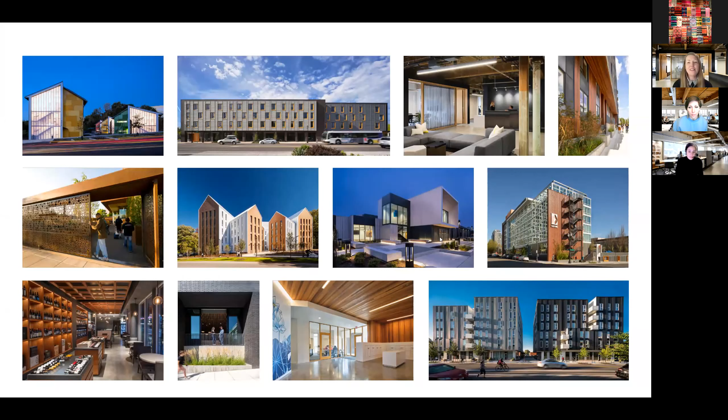So a little bit of history about our firm. Holst began 28 years ago with founding partners Jeff Storer and John Holmes working in their attic, which ironically is now what I'm doing, back then with drafting boards and I think one computer. If you put their last names together, Holmes and Storer, you get Holst. That's where our name came from.

About 4 years ago, we went through a leadership transition where those two founding partners retired. There was some more growth, and my partners Kim Wilson, Dave Oddie, and Kevin Volk took over the reins. Also in 2017, we became a certified woman-owned business. We had some more growth, and since then we've been doing great work.

We've been working hard to evolve and actively improve the practice, along with all of our awesome colleagues like Ray and Yuki. And if for any reason anyone else from Holst called in today, hello, welcome.

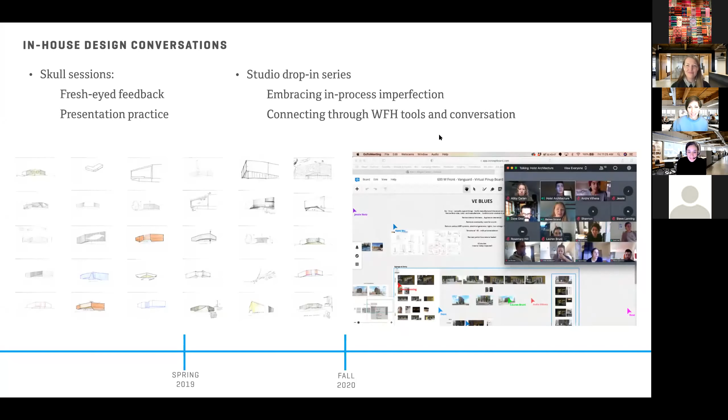Next, I'm just going to do one little snapshot of how collaboration works on an individual team, and I'll use my team as an example since it's what I'm most familiar with right now. But I think any team at Holst might have a slightly different take on this. I think there are three things on my team that seem to be emerging as really facilitating a collaborative design process.

I want to frame that within the larger acknowledgement that we're very lucky to have a toolkit of software that allows us to communicate and collaborate easily, such as Microsoft Teams, BIM 360 through Revit, and OneNote. Anything that allows simultaneous, quick back and forth organization of thoughts and ideas has been completely critical during this time of working from home.

But in a more intangible way, I think we've shifted, as Renee mentioned, from the phrase 'best idea wins' to just 'best idea' - removing that word 'wins' keeps the conversation open. There's something about winning that is very goal-oriented and shuts the process down a little, tending to pin it to a person for the duration of a project. Whereas if you say 'best idea,' there's an acknowledgement of ambiguity and contextual specificity - this best idea might work for this client, this context, this period, but it's not the universal best idea in that winner-takes-all mentality.

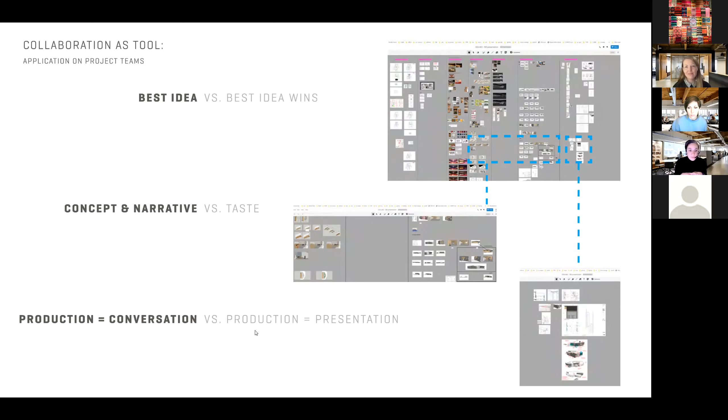So, benefits of collaboration - I think there's probably 100 items on this list, if not more. But in terms of what we're starting to observe at Holst, I think there are 4 different scales at which we're starting to see some of the benefits. At the individual level, I think having passion and ownership of design ideas leads to a sense of well-being and empowerment within your work and professional growth. At the team and firm level, greater collaboration and involvement in a project really bolsters skill and leadership growth, so it creates resilience.

At the level of the architectural field, talking about design can feel vulnerable at times - not just talking about design, but sharing one's own design ideas. So opening up, as I mentioned earlier, a space where failure is reframed as a learning opportunity, whether in conversation or brainstorming, has deepened our design conversation. And beyond Holst and beyond the profession, practicing collaboratively within the firm allows us to work better with the community and our stakeholders, shifting the idea of the architect as an author more toward the architect as a translator.

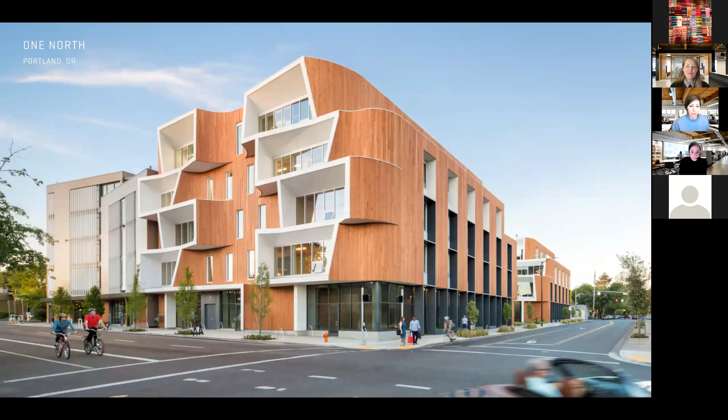The first two projects that I'm going to talk about are slices of city, we're calling them, and they're examples of establishing partnerships to realize a project. This first one is One North, which is a commercial office building in Portland.

This is a repeat client, I think the second project that we had done with him. And he came to us inspired by Gaudi and posed a question like, why do all buildings have to be rectilinear? So he wanted us to push these limits of form, which was interesting. It had worked the inverse way where we had come up with this design to show it to a client. As you all probably know, a lot of clients would be scared off by something like this, but it was a challenge for us to move forward with. The project is actually 2 buildings about 80,000 square feet, separated by a large public courtyard.

At the same time that One North came about, we also had been talking to a creative agency in town called Instrument, and they were looking for a new space for their office and creative workforce. Both owners were facing challenges on their projects. Instrument was having a hard time finding the right space, and One North was having a hard time finding an anchor tenant for the space. So we introduced them to each other, which is what made this project work.

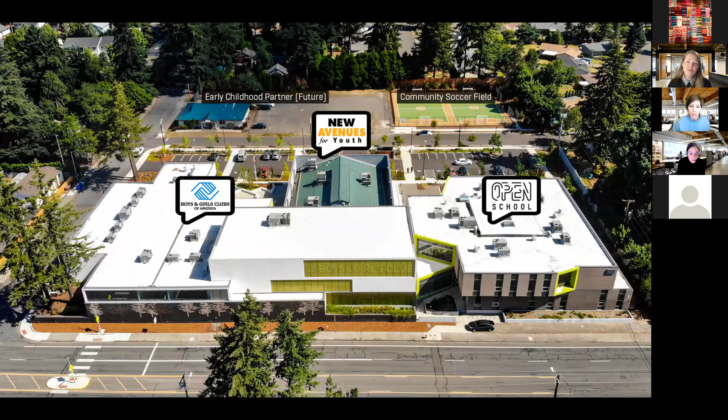Holst had been selected to design a new facility for Open School back in 2009. They needed to move because the people they were serving had shifted to a different part of town, so they needed to follow these people and place the services where they would be most utilized. But a new build was proving really expensive for them, and they weren't sure how they were going to make that work. So we were waiting for the right synergy of things to come together so that we could design this project for them.

Then we interviewed for Boys and Girls Club. They were moving out of a long-time location for similar reasons, needing to move services to be more central to the population that needed them most. They had found a site, but it was too big, though it was in the service area they wanted. So it was like each piece was coming together.

So we introduced the two agencies. Not only could they share the site, but they had complementary program pieces to share, like the cafeteria, the gym, and the assembly space. The sharing worked really well because Boys and Girls Club is a before and after school program, and the school operates during the day, so it didn't conflict with any of the school's needs. This collaboration provides great benefit to young people in an area that needs it most.

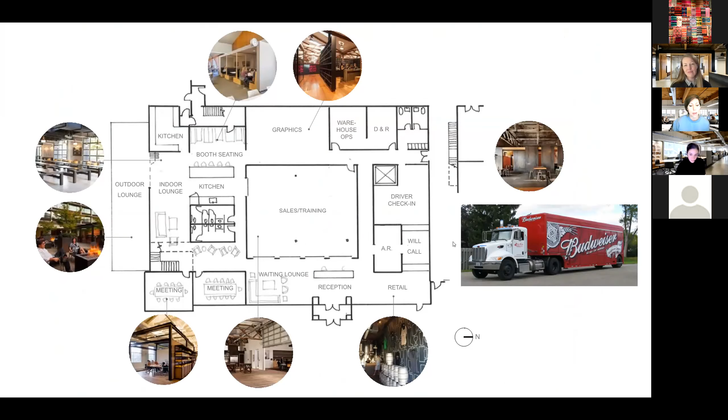In one of the early design concepts, what we proposed was to move the sales room front and center, and we likened it to their delivery trucks, these side loader trucks. It's the style of truck that they use to do all their deliveries around town. They were really drawn to this idea, and the thought that they could showcase this more active space up front was attractive to them. They decided not only to use it for their sales people, but realized that they could also utilize it as an event space. So this is the main first space that you see when you walk in the front door.

Then we actually moved their office space upstairs. It had previously been some of their underutilized warehouse space. It wasn't part of the cold storage, it was just a warehouse space. This being an industrial building in an industrial area, we stripped it down so you can see the nature of the structure and really see some of the things that the building had to offer already there.

They converted to an open office, which was kind of a stretch for them. They had been used to those really tall cubicles, but we balanced that with a lot of different quiet spaces or amenity spaces where they could convene and have little meetings if they wanted to. Like this, we called this a meeting pod, a freestanding open air room in the middle of the space. We continued some of this industrial detailing with these big sliding doors and even small details like trimming out the sidewalls of a skylight with copper, copper being a material found in some traditional beer making equipment.

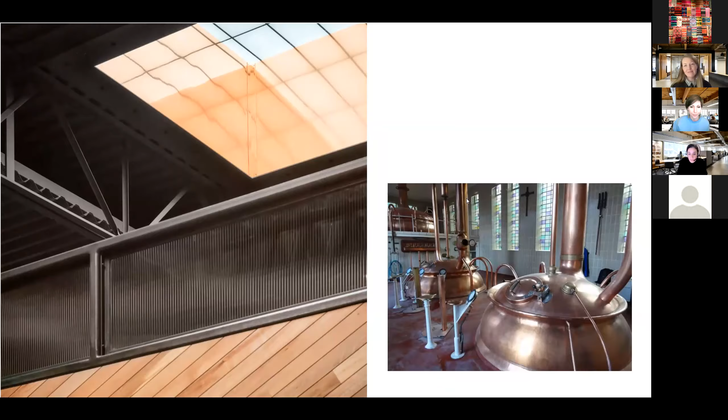For the rest of the space, we took things that they see every day and just kind of elevated them. We turned these kind of mundane things that line all their shelves and really started to showcase those things. So we have this keg wall in a really active space, visible from the reception area, and this bottle screen.

A funny story at this point, the bottle screen always makes me think of this. We had given them the budget that we got from the contractor when they priced out our schematic design drawings. The budget was pretty high, and we were pretty nervous, thinking we're going to face some serious VE for this project. We were all sitting down in the conference room, and Rob said, well, did you get all the cool stuff in? Did you get the keg wall and the bottle wall? Did you get the outdoor space and the brewery in the back? And we said, yeah, that was all in there. That's part of why it was more expensive. And he said, oh, that's great, let me go get a case of beer for everybody. He sent one of his employees out, and we all went home with beer.

Lucky for us, there is a retail space also in the building, so we can always just drop by and get more cases of beer. The great thing about the collaboration on this space is that they were really proud of it when it was done. It really felt like them, and it felt like home. And we, of course, were really proud as well.

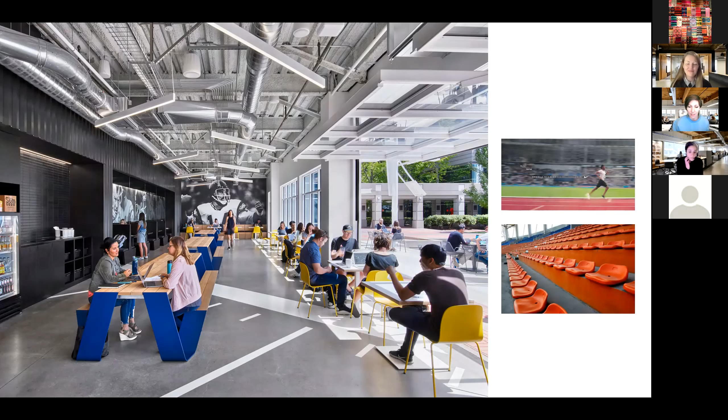We learned pretty quickly that they have a really strong design language they use to talk to each other about design. That was something different for us because, as architects, we kind of have our own language that we're used to. So it was really about understanding the terminology they use to describe things and adopting that as our new lexicon. They would use adjectives like stadium, hub, and community - words that don't necessarily always describe space, but the way they'd use it was that this was not stadium enough, or this was not hub enough. That was kind of an interesting insight into their company and their process, to get a taste of that.

We had some fun with them in terms of what we got to do. This is one room, one meeting space, that was dedicated to Dan Fouts and football, and we had fun with a lot of the different elements in here. We also did the entire furniture package for the building, so that was an interesting part of this project.

The collaboration on this was really great, having this strong design vision that they had. And with this space, we feel like it even more so showcases their brand and their identity.

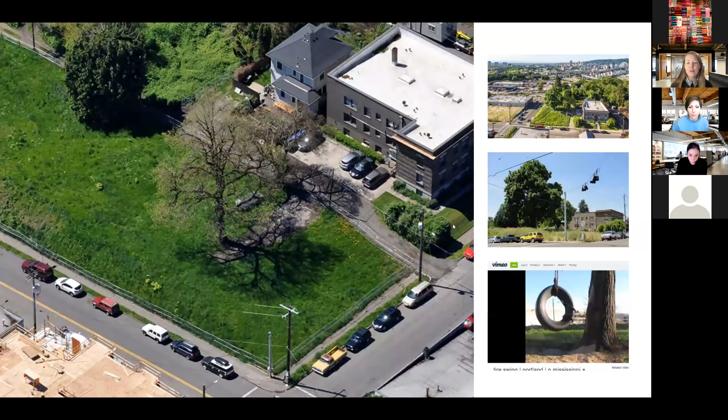The slice from this project that I want to highlight related to collaboration centers around a tree on the site - not just any tree, but a huge walnut tree that was sort of a neighborhood icon and popular hangout spot. It even sported a tire swing that had some videos posted about it, and it had its own Vimeo channel for a while. It was a very important tree in the neighborhood.

When we started on the project, we first looked at massing the building on the south side to preserve an open area at the north and keep the tree. But as the design process progressed and arborists evaluated the tree, it was determined it was pretty unhealthy. It had a big split down the trunk and maybe had about 10 years before it was going to need to come down.

So in honor of the tree, and the site, and that tree's popularity in the neighborhood, we worked with the contractor to have it taken down and milled for reuse. We've had this done now on a couple of Holst projects, but a portion of the wood was given to a furniture maker who lives in the neighborhood, actually right across the street from the project, and he does a lot of local work.

We set aside a portion of the dried wood and wanted to create a special piece for the project. The project architect for Holst on this job is also a skilled woodworker, so he created a large table for the project, designed and built it himself. It's located in the community room on the ground floor.

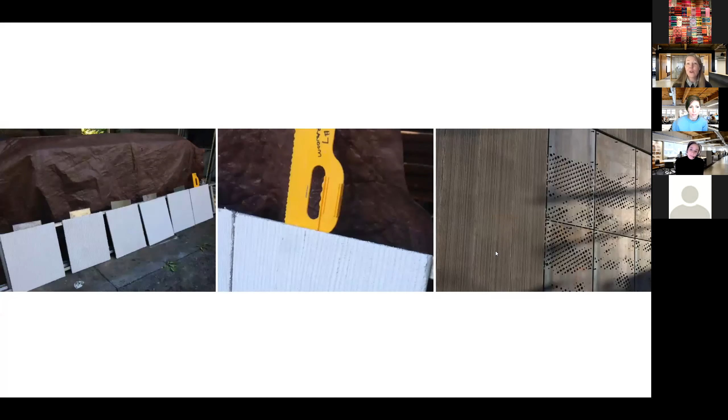As part of this process, Kim Wilson from our office created a series of trowels at home on her grinder to test out a variety of different raked stucco textures for our design team to evaluate. We were able to work with the subcontractor and the stucco craftsman on the project to have them replicate dozens of these custom trowels for the project. It was a really great method of collaboration.

In the end, we were able to create what we think is a really striking stucco over cement board base to the building - a modern interpretation of that historic stone base on a lot of those downtown buildings, but this time using a modern local craft for the work.

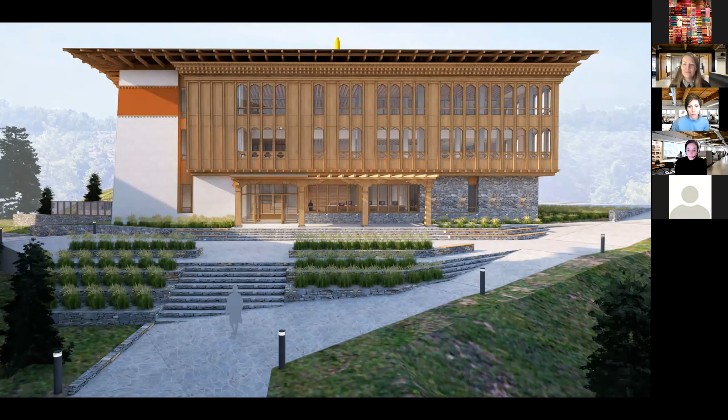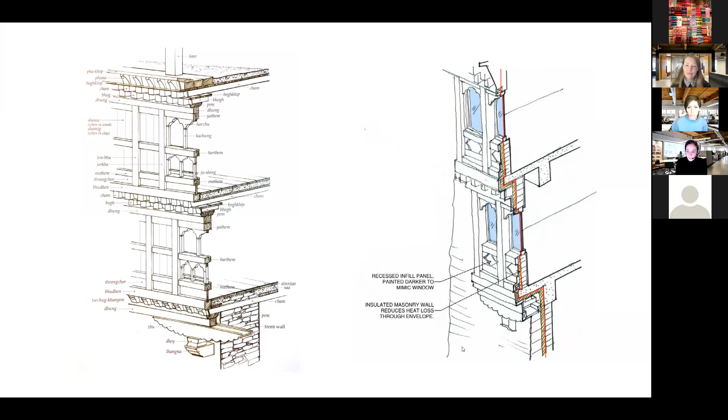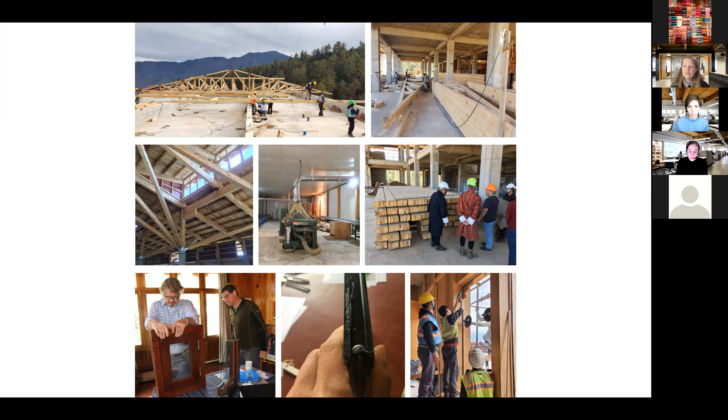For the operable units, we worked with our Bhutanese partners to find a wood window and door fabricator who could adopt the use of a router to get the profile for an operable window. Those machine equipment pieces have been imported into Bhutan, and they are currently working on cutting those window profiles.

In terms of the interior design language, there are a few key opportunities within the building itself that we're really excited to look to traditional Bhutanese culture as inspiration for, and also work very closely with our client here in Oregon.

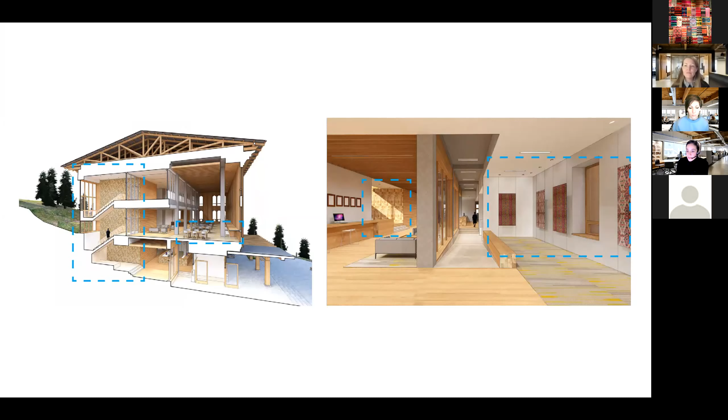There's a large triple height stairwell that has a single continuous vertical wall that's really an open canvas for some kind of display. We looked to traditional Bhutanese textiles as inspiration for what we might be able to do with this wall.

We also took a cue from vernacular materials, which we found and were inspired by just driving around the country. There's a lot of wood elements out drying and stacked in various patterns, diamonds, linear, vertical, horizontal. There's also a very rich woodcraft tradition in Bhutan, and this deep heritage of hand-woven textiles that is a key cultural interest of our Oregon client, combining all of these beautiful textures and colors.

We thought about this triple story wall as a three-dimensional series of stacked end grain wood blocks. What began as just normally oriented stacked blocks in the 90-degree direction evolved over time.

First, they were rotated to recall the diamond patterns of Bhutanese textiles. And then the client actually asked the great question when he was on site of whether those blocks could be arranged to describe larger patterns within the wall.

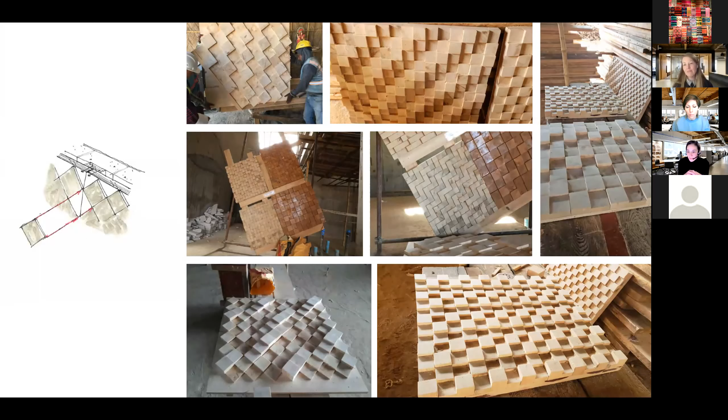So then we worked with the Bhutanese craftspeople on site to do a series of tests for how that pattern might get arranged. We did maybe 8 or 10 different options on site very quickly and with a high degree of precision. What we landed on was a version called the diamond wave.

I think something like this in the US would probably require a lot of machine cutting to execute with the same amount of precision and care.

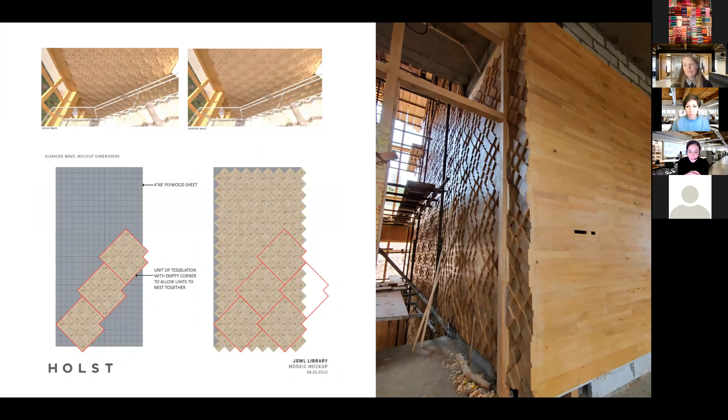Just to wrap it up, that design exercise that we went through with the client, facilitated by the high skill of the craftspeople, then fed back into the other central space of the project, which is this double-story reading room.

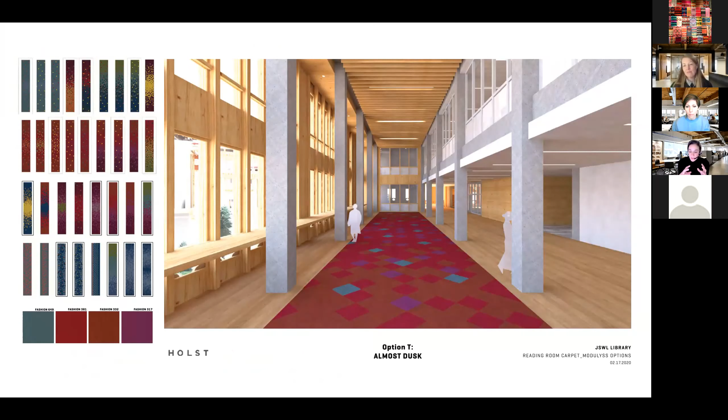Recognizing that we're working with the same square shape of a carpet tile, we realized that if we just rotated them and then studied a variety of different patterns and colors, we could create a larger carpet that again got its inspiration from the tradition of Bhutanese textiles.

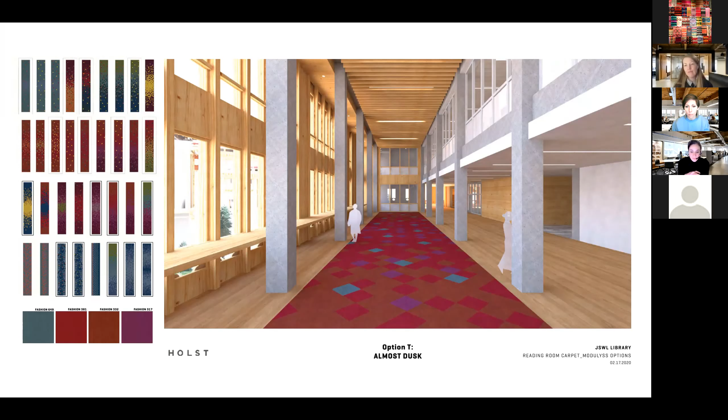I'm gonna hand it off to Ray.

With this, this is our last slide, and this is a really quick in-house project that we do, and it's a really fun one for us because it's collaboration, but it's collaboration only with our fellow Holst people that we work with, our colleagues. This is the Winter Lights Festival, which is held every winter in downtown Portland.

Submissions are open to artists and designers, and Holst has participated a few years running. It's open internally in the firm for anyone who wants to participate. We put the call out every year.

It's usually a lot of time, so it's like whoever is not under deadlines, those are the people that usually end up working together. But it's great because it ends up mixing up teams, so people that you maybe hadn't worked with either ever or anytime recently, you get to work with on something like this.

So last year's submission, we built something that was kind of bigger and bolder than the previous years, which seems to be a trend that we're going for to some degree.

We started off really early wanting to use fabric. We knew that we wanted to incorporate that in some way, and then started asking the question about, if we're going to use fabric, how do we suspend it, or how do we stiffen it?